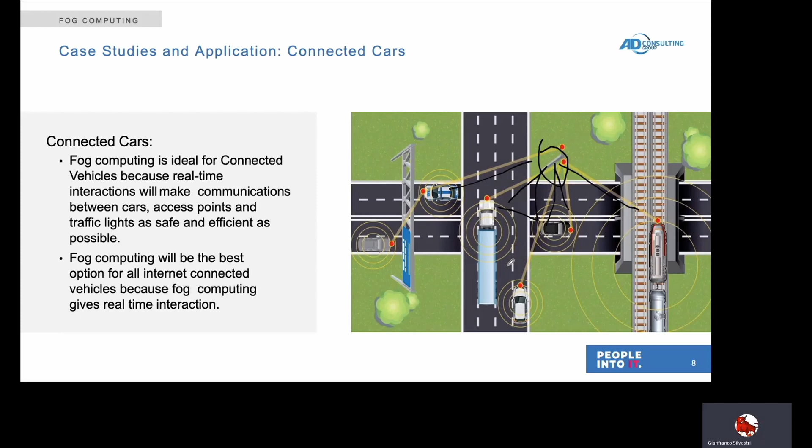And does it work? Yes, it works, and we did it here in Modena, in MASA, Modena Automotive Smart Area. What we did: we implemented real-time reduction of delay times from 3 to 5 seconds down to milliseconds, OBU onboard unit support with roadside calculation, and communication security from vehicle to fog and from fog to cloud. And by the way, already aggregated data means less cost for connectivity and cloud services.

The Internet of Things, IoT, aims to connect billions of smart objects to the Internet, which can bring a promising future to smart cities.

These objects are expected to generate large amounts of data and send it to the cloud for further processing, especially for knowledge discovery, in order that appropriate action can be taken. However, in reality, sensing all possible data items captured by a smart object and sending the complete captured data to the cloud is less useful. Further, such an approach leads to resource wastage, for example in network and storage. The fog computing paradigm has been proposed to counter this weakness by pushing processes of knowledge discovery using data analytics to the edges.

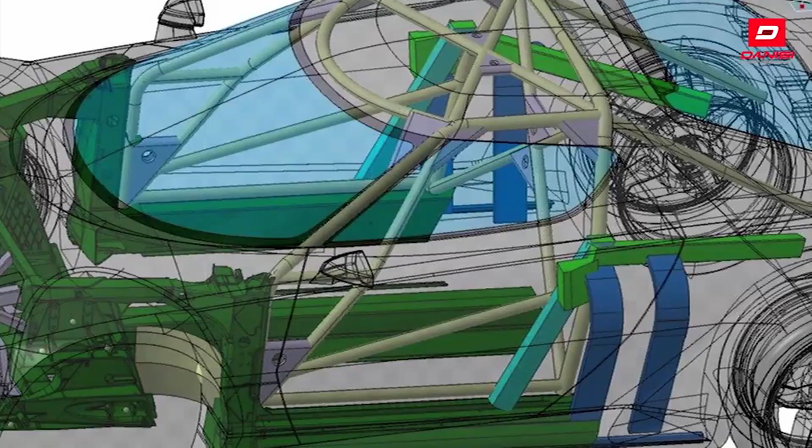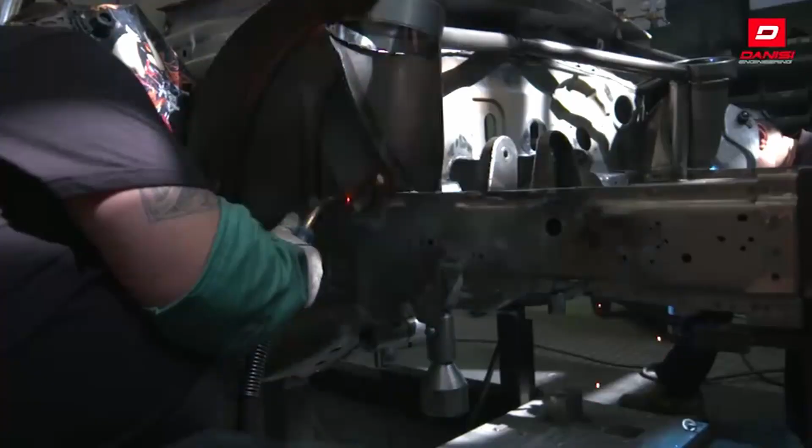Danisi Engineering is a company that was born 25 years ago with specific skills on vehicle dynamics and chassis engineering. Through these 25 years, we were adding a lot of other competencies, methodologies and tools. Nowadays we are a full service supplier giving support to OEMs and Tier 1 in developing new products and mainly new vehicles.

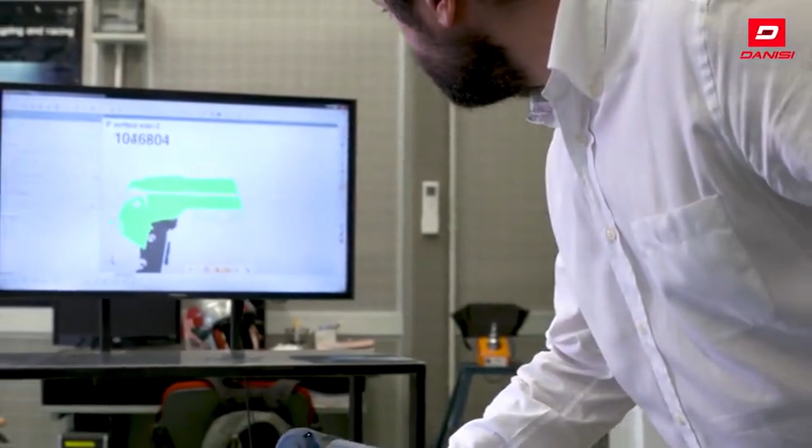We put a specific focus on integration, so we were developing a lot of innovative methodologies in order to better integrate the complex system that is a modern vehicle. Here in this facility we have some of the most advanced tools and we will go through these tools. We will present you our methodologies, and to do so I will leave you with Maurizio, that I will join very soon, and we start our tour.

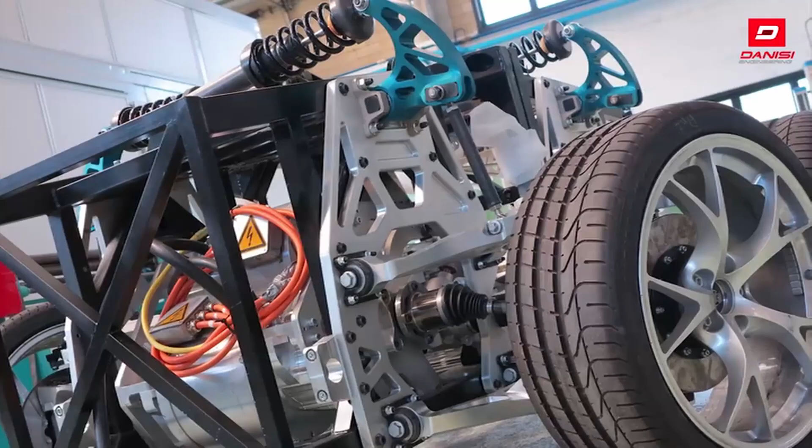Hi everybody and welcome in Danisi Engineering. In this period, the automotive sector is facing a sort of revolution if we consider the electrification path, the autonomous driving development, and new frontiers in connectivity. The big challenge is to introduce in the market as quick as possible new features and innovative technologies, but keeping in mind the business sustainability.

Before starting the production of a new product, OEMs and Tier 1 have to face a very long validation and testing process, using a lot of prototypes and pre-series cars, tested in very different conditions. Is there a place in which you can have thousands and thousands of prototypes and a plethora of open roads and testing tracks? This place is our Advanced Vehicle Dynamics Center, in which every day we can test different cars with different architectures. We can validate alternative technical solutions.

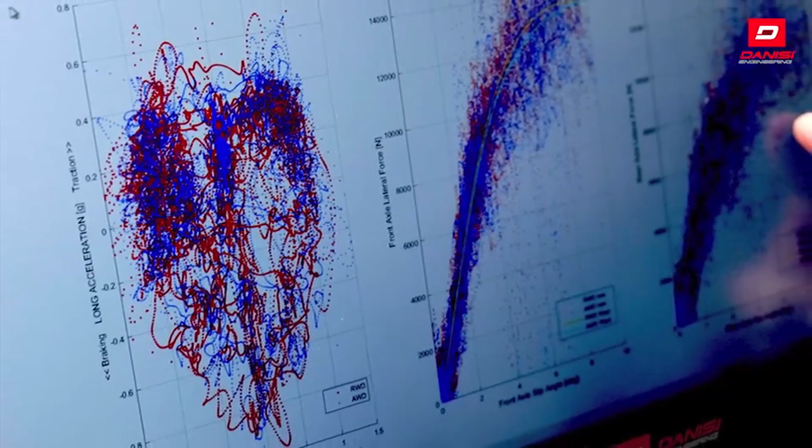We can judge the performance of different powertrain combinations. So this is our state-of-the-art methodology to support our customers in developing new products.

In the meantime, we have reached our static simulator area. Here we have one of our main tools in the development process, which is the static simulator. The main problem to shorten the development time is to start testing and to start the tuning of all the system as early as possible. And one big bottleneck is when the first prototype will be ready. So, with simulation techniques, simulation methodologies, we can start testing actually before the first prototype will be ready.

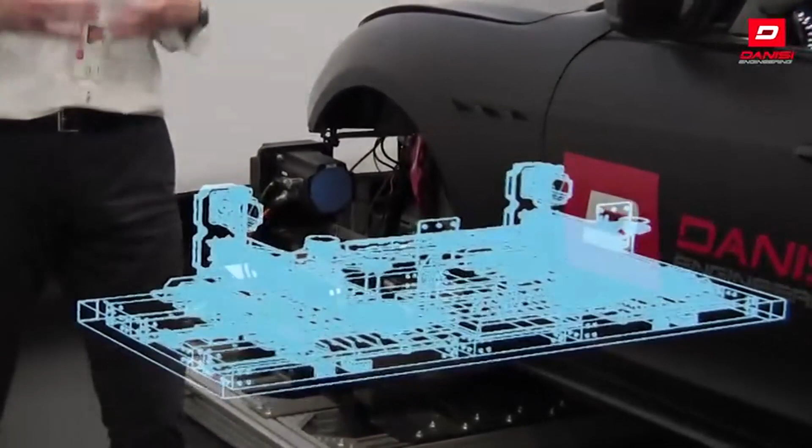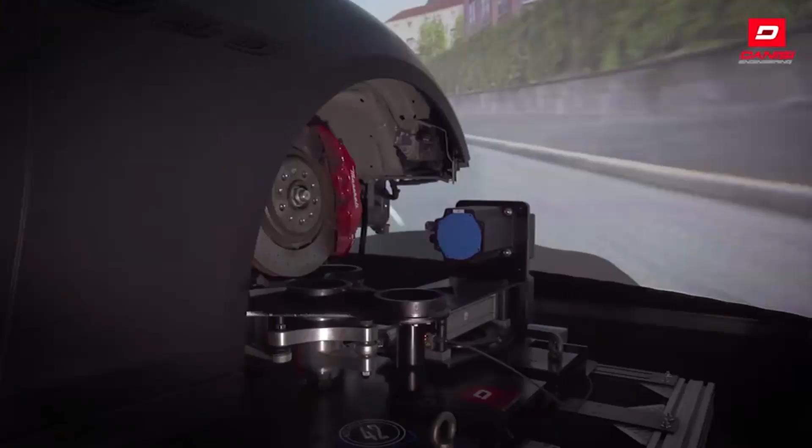Here in our static simulator we can put a car with all the original electric and electronic systems that will be under development, and we can even integrate some important physical systems. So at the end, we are able to make a kind of testing that is half virtual and half real. We can integrate parts like the steering rack, and here we have a specific bench for the steering rack, real components that get integrated into the virtual prototype. So actually it is a virtual prototype that is making real parts work. In this way, we can start the development process very much in advance.

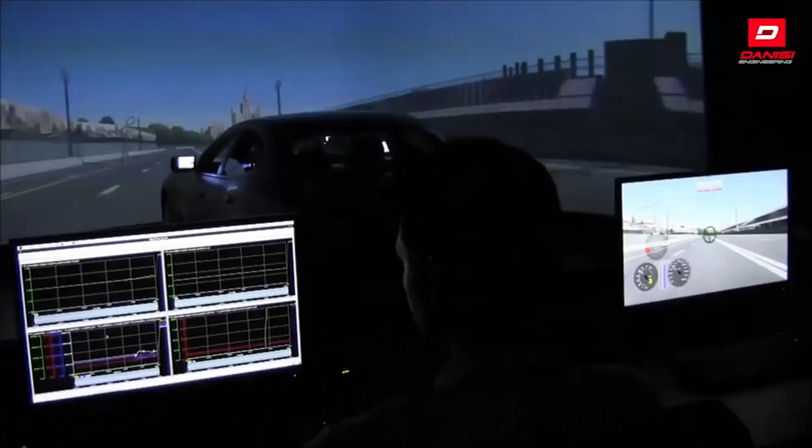There are a lot of strong points in this kind of approach. First one is timing - we can start earlier and be quicker. Second is the repeatability of the testing conditions, because in real testing, it can rain, it can be colder, it can be hotter. Here we can do the same test as many times as we like in fully controlled conditions. So it's a kind of laboratory conditions.

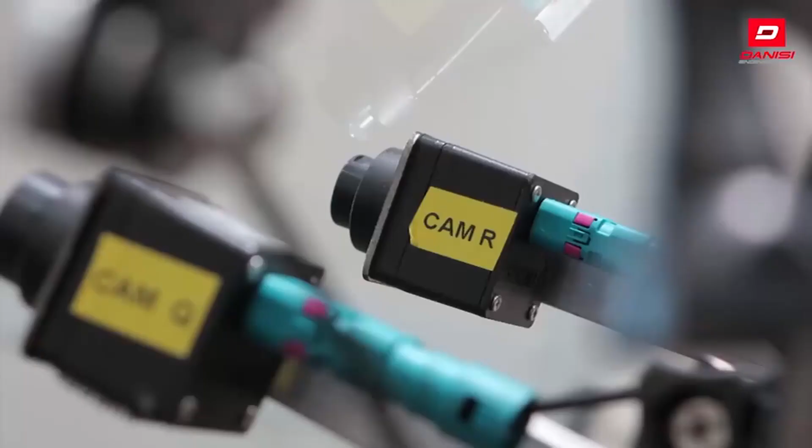Another very strong point is that we have full safety. We can even try and experiment something that is very dangerous, and if something goes wrong, everything is safe, under control. We are using this a lot to make the so-called fault injection testing, where we inject some bug in the software to check how the system will respond. To do this in the real world is quite dangerous - here we can do it in full safety.

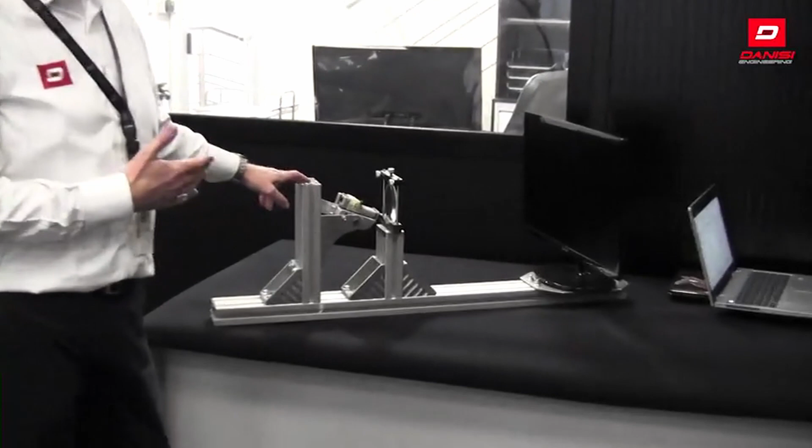Another thing I'd like to show you is this one - a small test rig that can put hardware in the loop, so on the virtual prototype, the real camera for the ADAS systems, for lane keeping, for automated driving. The camera is here and not on the car because on the screen of the simulator we have an image that is made to cheat the human eye. The camera is in front of a screen where there will be an image that is the same and synchronized with the simulator, which will cheat the camera.

But now we can go to see our dynamic simulator, which is even more spectacular than this one, where Maurizio is waiting for us. Let's go.

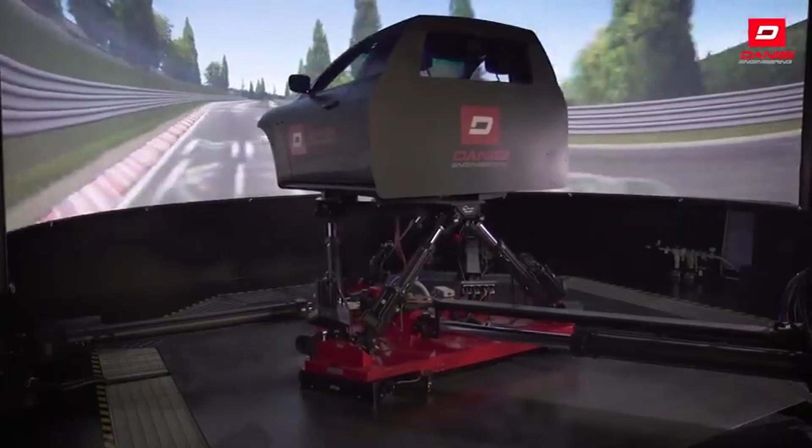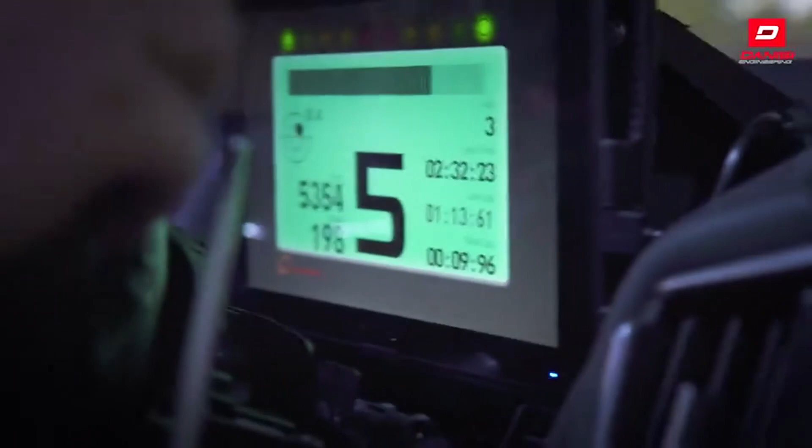This is the dynamic simulator, the most advanced tool we have here at Danisi Engineering. It is perfect for supporting each step of the technical development of a new product. With this tool you can feel acceleration and deceleration, perceive the grip on the road, and evaluate and judge the powertrain performance of the vehicle.

Oh, ciao Giacomo. So here we are, and I would like to, I'm interrupting Maurizio, not that polite, but I would like to...

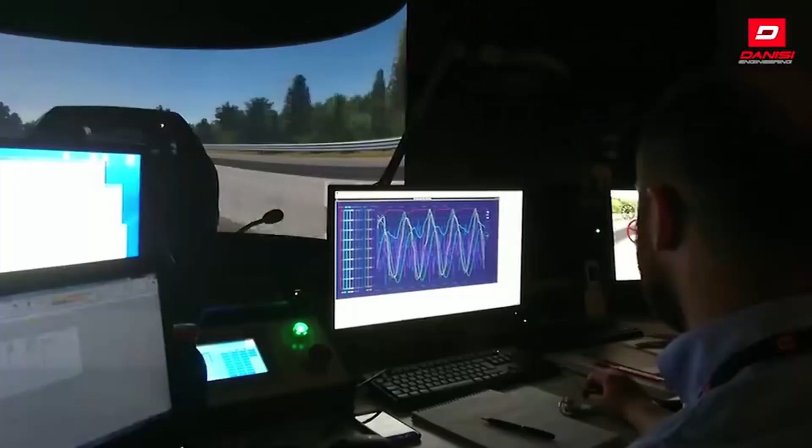I'd like to add a couple of points about simulators in general and dynamic simulators. We have our engineers in the control rooms who can change any parameter more or less in real time. This is very important because you can test two different setups or configurations in a few seconds, switching from one to the other. Whereas in the real world, if you don't have two prototypes and have to update the one you have, it can take several hours.

The other aspect that is very important is integration. We say that one of the main competencies at Danisi Engineering is integration. With the dynamic simulator, we can integrate the driver, the human, together with the vehicle. In modern vehicles, a lot is done by electronic controls, and these controls need to keep the driver into consideration. The driver is acting on the car, acting as a sensor, feeling what is happening, and also acting as an actuator. So one ring of the control chain is the driver.

This tool allows us to study the control with the full chain, with the real driver inside. So this is a way to integrate reality, the driver, a real human, into a virtual methodology, to go deeper into these kinds of aspects and methodologies.

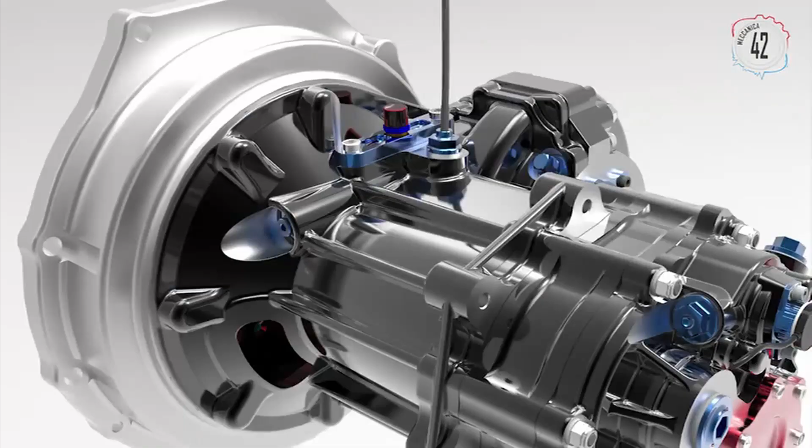Hello Giacomo, thank you for your kind introduction and welcome to Meccanica 42. This company was born in 2015 as a spin-off of the University of Florence, in close partnership with Danisi Engineering. We mainly focus on development of mechatronic solutions for the automotive industry, and we validate advanced vehicle functions both on the road and in a driving simulation environment.

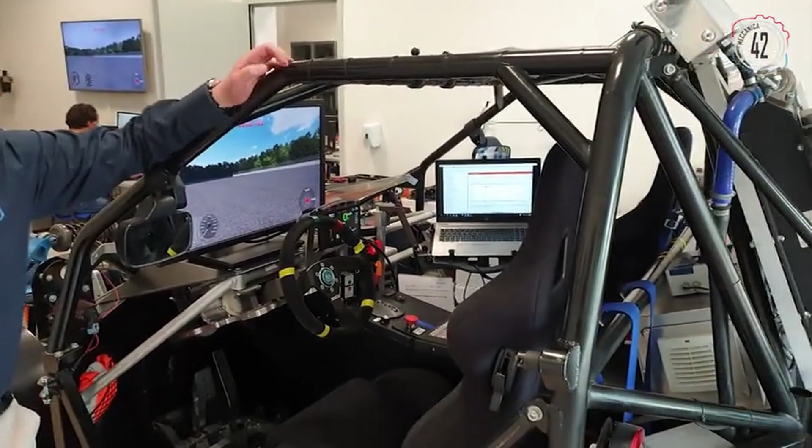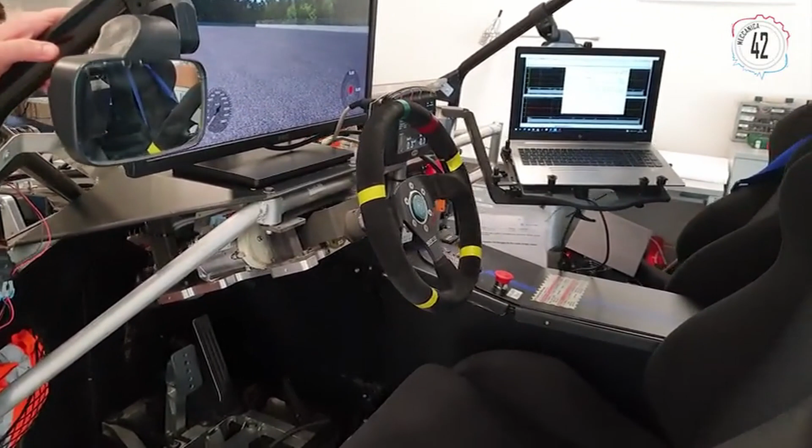This vehicle is a good example of what we do here. It is a fully by-wire vehicle coming from one of our customers. It is a steer-by-wire vehicle, so the steering wheel is not connected with mechanical joints to the front steering wheels. We are also integrating a brake-by-wire system in which each wheel is actuated by a single actuator, to have good braking performance.

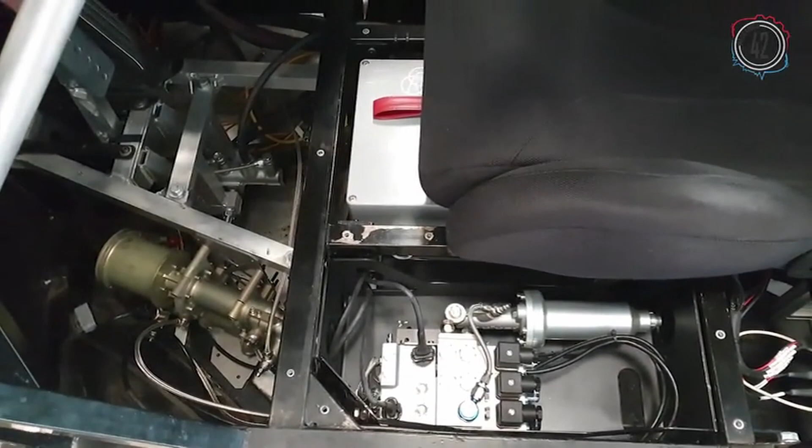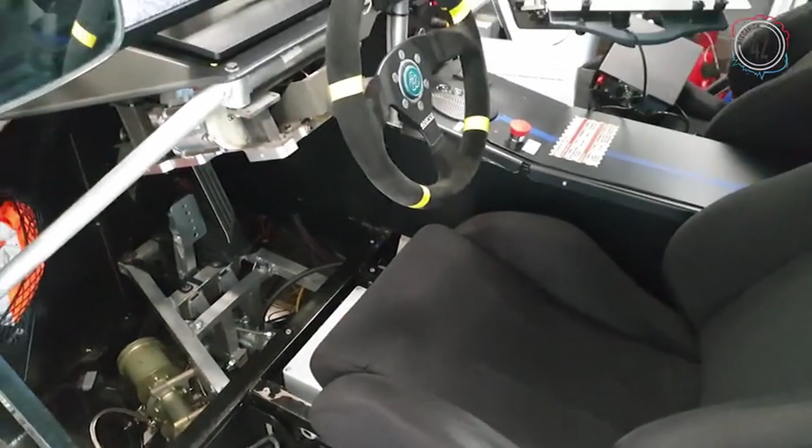To guarantee a good level of safety, we also installed a fallback unit, so in case of emergency, the fully passive braking system is recovered. We also have a feedback unit to provide correct feeling on the pedal. Since this vehicle is completely drive-by-wire, we can integrate it into a driving simulation environment, where a driver can test all the vehicle's functionalities and see, for example, if it remains controllable if one of the actuators goes into a fault condition. Now I can drop into the car and take a short run into the VDA.

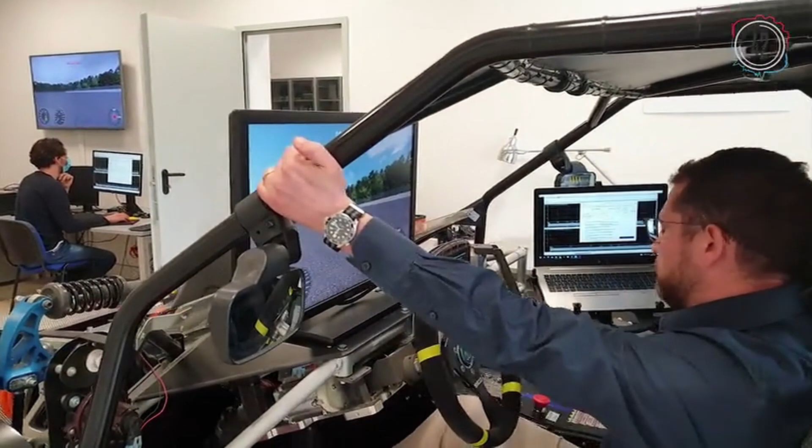I'm starting the simulation. Just a quick run, going to 60 kph. Now starting steering, recovering the trajectory, and going straight and braking. That's it. Thank you for your time, and the connection goes to Modena. Goodbye, thank you.

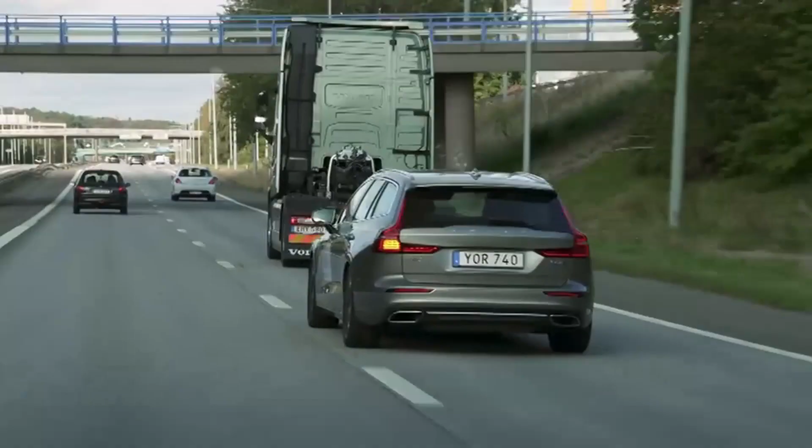The third showcase is from a test track where a partly autonomous driving car was connected to Carmenta Traffic Watch, mixing real objects with simulated ones, showing how the car control system gets both decision support on how to adapt speed in the vicinity of an emergency vehicle, and also receives warnings about vulnerable road users and roadworks.

The following short film showcases how Carmenta Control Tower supports automated vehicles with situational awareness and how a control tower setup for a fleet of automated transport vehicles could be arranged. Tests and demonstrations are performed on public roads and on test tracks.

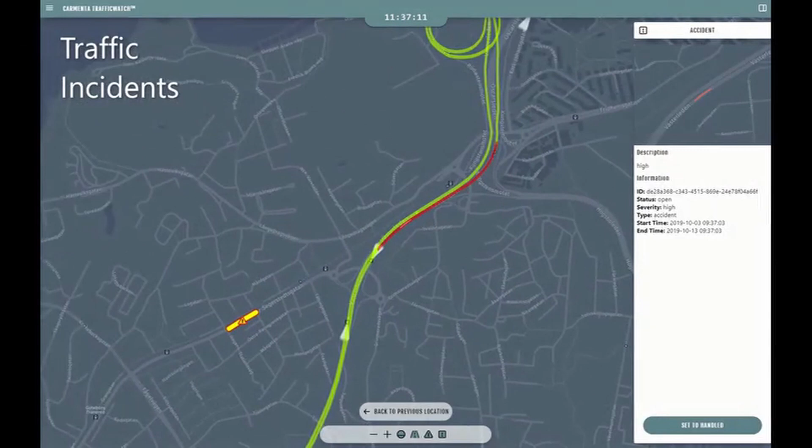Traffic incidents reported from traffic authorities are followed closely in Carmenta Traffic Watch, and a rule engine is used to decide proper actions, such as automatically sending advice to an OEM to disable autonomous driving on the affected road segment, or even issuing a safe stop.

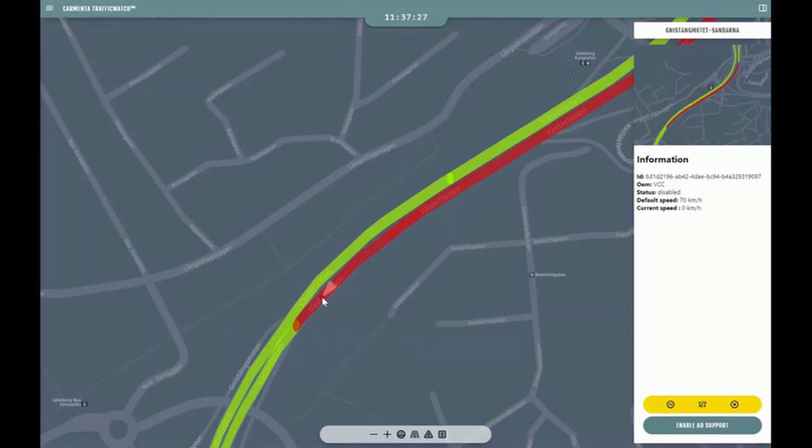An incident on the road, such as a traffic accident, can allow a manual operator to decide how and when to issue advice to the OEM when any of their vehicles approaches the accident.

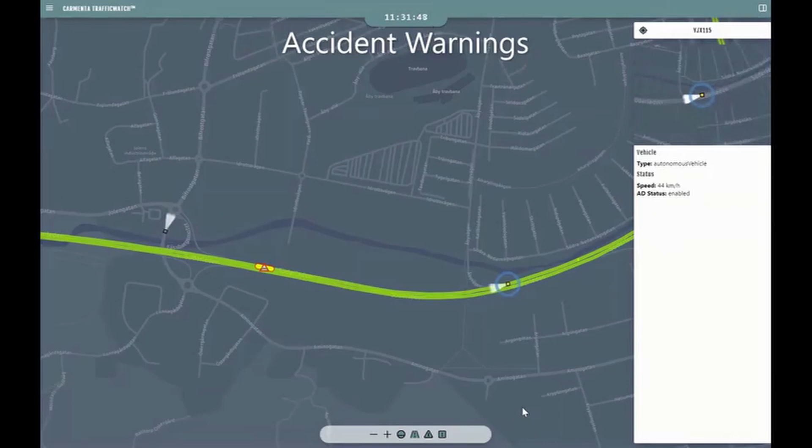Carmenta have worked together with the Italian company and MASA partner Sprinx Technologies to connect their Sprinx traffic system with our Carmenta Traffic Watch platform. This adds a very intelligent traffic monitoring system to Carmenta Traffic Watch that automatically detects and reports activities in the traffic environment. One example is pedestrian detection that could be used to warn if a person is walking into a dangerous area. This creates an incident in the Sprinx system that may trigger an action in Carmenta Traffic Watch. The integration also allows control over the Sprinx system and traffic cameras from Carmenta Traffic Watch. Live video feed can be activated by the traffic operator for a better understanding of the traffic situation.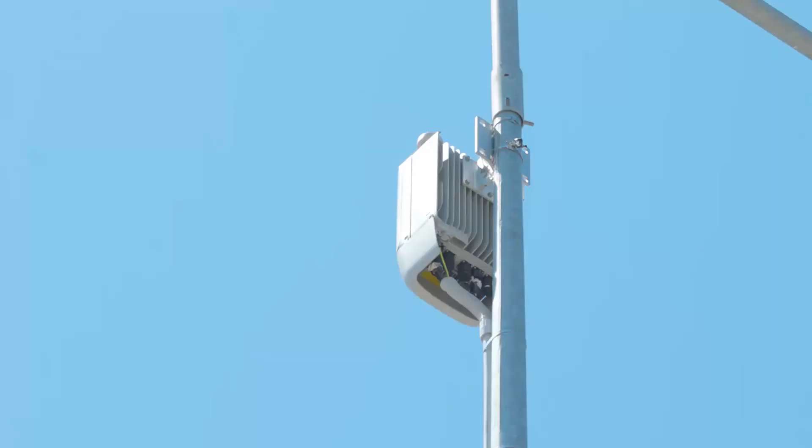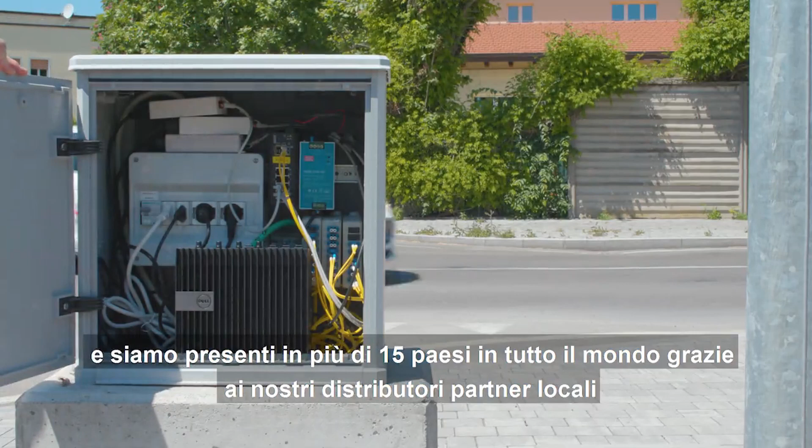Sprinx has an international reputation on the market. In fact, we have already provided more than 80,000 video channels in 10 years of our life, and we are present in more than 15 countries all around the world thanks to our local distribution partners.

Thanks to our internal R&D department with high profile figures in the field of computer vision and artificial intelligence, we are able to provide something really innovative on the market in terms of mobility analysis.

We are very proud to be part of the MASA project because we think that when we speak about smart mobility, we don't speak about a specific technology, but we speak about the combination of the best of breed of technologies. In fact, it's the enrichment of the data coming from different technologies and sensors that can make mobility real smart.

We are very happy because in this case we have provided our software platform called Traffix.ai, based on deep learning technology, that connected to standard CCTV cameras is able to give information about the mobility, immediate information about anomalous situations like wrong-way drivers, unsafe lane change, stopped vehicle, or pedestrian in the carriageway.

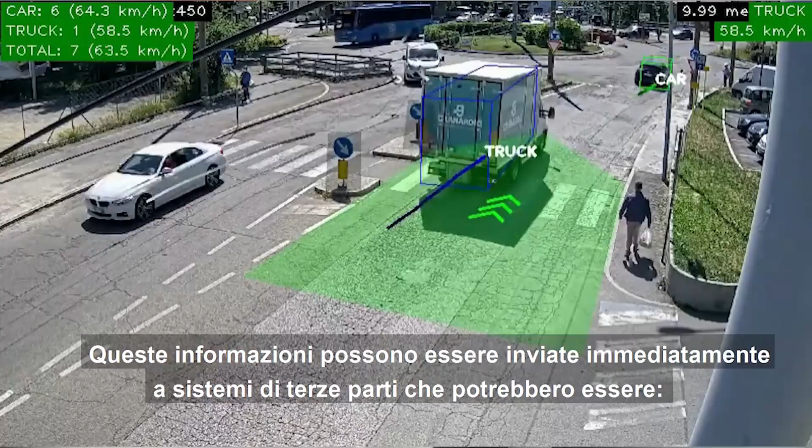And this information can be sent immediately to third-party systems, that could be the software in the control room, whether that's the operators, but also to the drivers, thanks to software installed directly in the vehicles. So the drivers can be alerted immediately and we can reduce the risk of accident.

But our technology is able not just to give immediate information about dangerous situations, but we can also collect useful information about traffic mobility. For example, we can classify the vehicles, count the vehicles, and give information about the average speed of the vehicles. This information is very important also for the traffic planners because in this way we can understand if too many trucks are passing in the city center, for example, or too close to the schools, and we can define new rules and new plans inside the city.

Also, the average speed is useful information in order to understand if it is important to introduce maybe traffic lights or roundabouts. We can give also information about the direction of the vehicles at intersections and roundabouts.

Last but not least, we have a new function that is able to give information about the violation of social distancing. As we know, all of us are looking forward to coming back to normality, or at least to a new normality. But to do that, everybody has to respect the rules. As we know, not everybody is able to do that. When we are outside, we forget this, and we must find out something that can help us reduce the spreading of COVID-19 and avoid going back to lockdown.

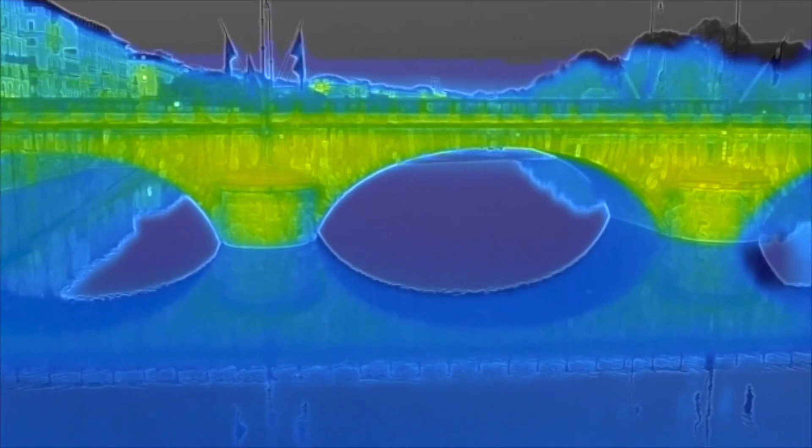Here we show you the images taken while flying over Valentino Park, maybe one of the most beautiful in Turin, located around the river Po banks. A total of 1.7 million square meters of park area have been monitored.

Artificial intelligence. We use artificial intelligence to analyze the video streams coming from the drones and detect people, vehicles, and any other object when requested. The detections are corrected in perspective, and the position on the ground is calculated.

Since the drones use 4K cameras, we can detect people even from a distance and from high altitude. This is particularly important in COVID phase 2, since people are allowed to go to the city park for outdoor activities, but recommended social distancing should be maintained at all times.

Those artificial intelligence algorithms calculate the interpersonal distance between people in real time and raise warnings in case the safety measures are violated. The dashboard.

All the data are available in real time and can be stored in a database to help in making decisions at commission level.

But since the data are available in real time, it can be used to trigger an immediate police response, like in this case, where 2 cyclists were caught in a city park during the lockdown.

3D mapping. Furthermore, the collected data can be used for alternative purposes, however, of great importance for the municipality. For example, drone video streams can be used to create high-definition 3D maps of the area overflown, like in this case.

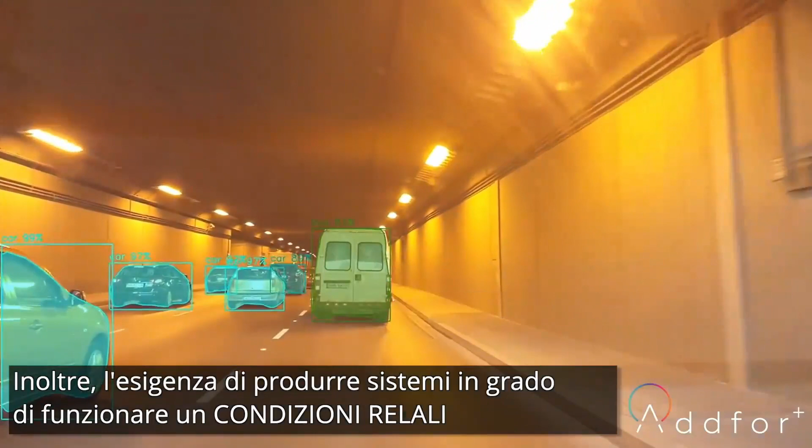Moreover, the requirement of obtaining a neural network able to recognize entities in real conditions, such as different weather and lighting conditions, or varying environments with different characteristics, makes the heterogeneity and variability of the training set mandatory. This means that to obtain a suitable dataset, we have to collect many images with a large number of characteristics, weather conditions, lighting conditions, and so on. Capturing enough images in the real world and then labeling them is an extremely expensive and time-consuming process.

Synthetic data can be an alternative solution to replace or integrate real data, and can reduce the problems of cost and waste of time. Obviously, other problems arise, and the most relevant concerns the problem of domain transfer. This means that synthetic images do not look exactly like real images, even if the larger part of the literature reports that synthetic images should be as photorealistic as possible.

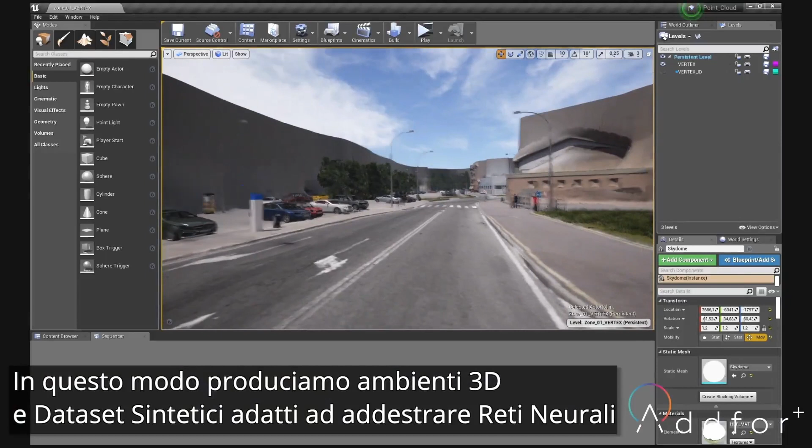In this sense, laser scan can be employed to acquire portions of the real world, producing 3D environments that have a high level of realism. These environments can be used to generate synthetic datasets suitable to train neural networks.

We used a laser scan platform to acquire some areas of the city of Modena. The platform is equipped with several laser scanners and a set of 6 cameras. The point cloud was used to model the meshes of the objects in the synthetic scenario and all the geometries in the environment. The images have been used to generate the textures and then the materials of the 3D objects.

This technique ensures a high level of photorealism, and the 3D environment can be used to exploit all the advantages of working with a synthetic navigable space. It is possible to automatically obtain the ground truth of the rendered frames by replacing the realistic material with monochromatic materials, and it is also possible to change weather and light conditions, or to add specific elements to better characterize the situation, such as representing critical situations like a pedestrian or a generic obstacle in the car trajectory. Moreover, it is also possible to add a number of virtual cameras and change many times the point of view.

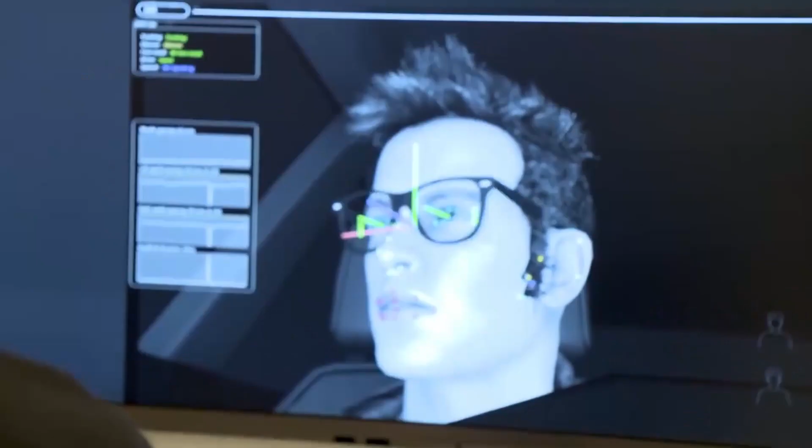We use infrared cameras, and we detect the features of the face, the salient features, like eyes, eye corners, nostrils, mouth, and so on. We build a three-dimensional model of the face using AI that we can track over time. That can be used to see if a driver in the car is drowsy, inattentive, or showing some other dangerous behavior. We can warn the driver before they actually fall asleep, because of course anyone can see if an eyelid is closed or not — that's usually way too late. You should really give feedback to the driver before that happens.

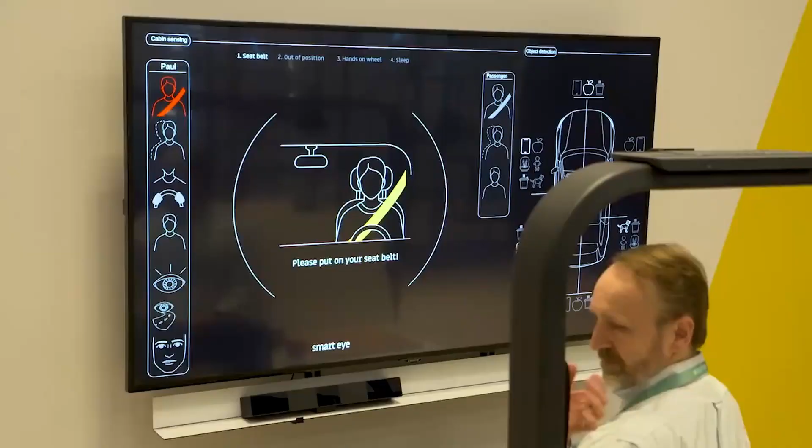A lot of the algorithms we are using are based on deep learning, so it's completely AI based, but we've also been doing this for a long time, so we also have a set of algorithms which works really well, just computer vision based traditional algorithms. So one of our strong points is that we can use the best from both worlds. The computer vision algorithms can be very resource light, and the deep learning algorithms can be very robust. So we can use both types of algorithms to get a good, really robust system. That's needed — if this is going to work in the car, it needs to be super robust.

This gives car makers the possibility, even with a level 2 system which is just partly autonomous, to allow the driver to not keep their hands on the wheel as long as they're really focused on the road. The trend we see right now is that the rollout of autonomous technology takes longer than people thought 2 or 3 years ago. We see that for sure there will be level 5 cars eventually — complete robotaxis that just circulate, which you book with an app, they pick you up, and you go anywhere. But this isn't going to happen tomorrow or in 5 years. You will have a few level 5 cars on the roads in 5 years' time, but I think the major rollout is after that. In the meantime, we see a strong trend where level 2, 3, and 4 cars are going to get better and better, and they're also going to be supported by driver monitoring systems.

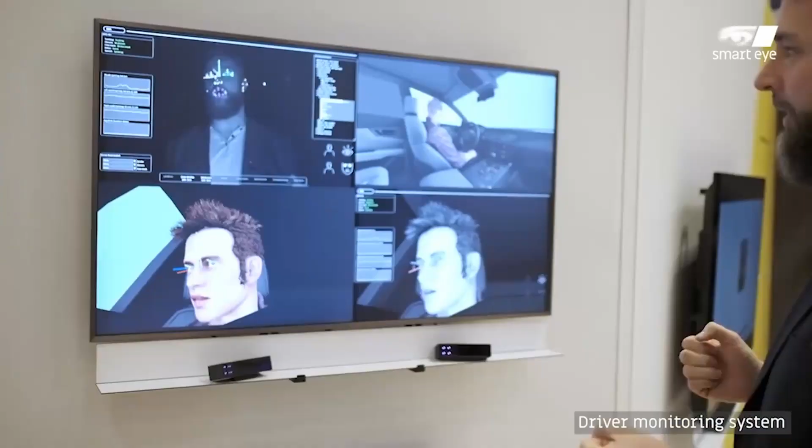As you can see with the overlay graphics on the screen, it's accurately tracking me regardless of how I move and what I do in the car. On top of all these signals, we are building state-of-the-art drowsiness detection and driver inattention detection algorithms that can be used to improve the safety of both manual and autonomous driving cars.

What we're also showing, in addition to our driver monitoring functionality, is our future functionality in the interior sensing space. Over here I'm going to show you how we can combine interior sensing with driver monitoring.

In the top right corner of the screen you see a driver monitoring view, with super high accuracy on my head position and gaze direction. In the top left part of the screen, the system has identified me as Peter, which is my name, so the system can do facial recognition to see who is driving the car. In the main part of the screen, we're showing body position, how you're sitting in the car, and what you're doing with your limbs.

We're also tracking objects like cups and food, and also, of course, the main thing in the automotive space, whether or not you are on your phone when you're driving.

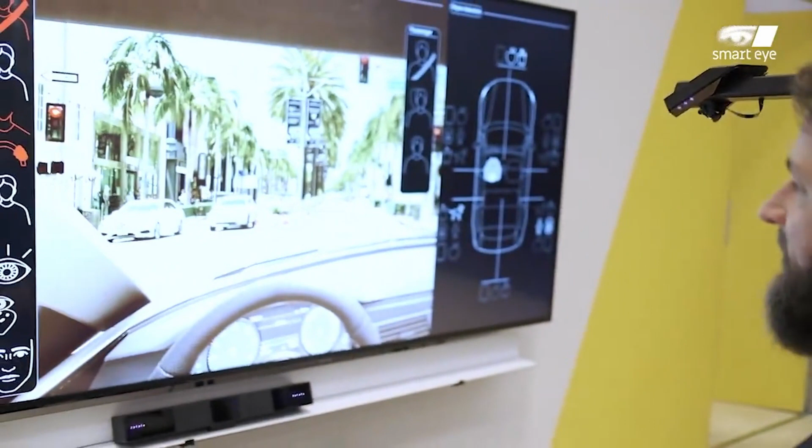Now I'm going to go through some of the advantages you get when you combine driver monitoring with interior sensing. Here in our driving simulator, I'm going to show you the different signals that we can get from the different cameras in the car.

From the interior sensing system, we can see in the top left part of the screen that I don't have my seatbelt on. If I take my seatbelt and put it across my chest, it detects that I have a seatbelt, and I get that in the buckle. Now I'm safely strapped into the car.

It can also detect whether or not I'm sitting in a good position. If I lean out of position, you can see that the car can tell I'm not sitting in a good way, and that it might not want to fire the airbag because I'm too close to the steering wheel.

You can also see that when I hold my hands out and touch the steering wheel, it detects that I'm holding the steering wheel, and when I take my hands away, it can tell that as well. Also, if I bring an object up to my mouth, like I'm eating, or a cup, like I'm drinking, the system can accurately tell whether I'm doing things that could be considered dangerous in a driving scenario.

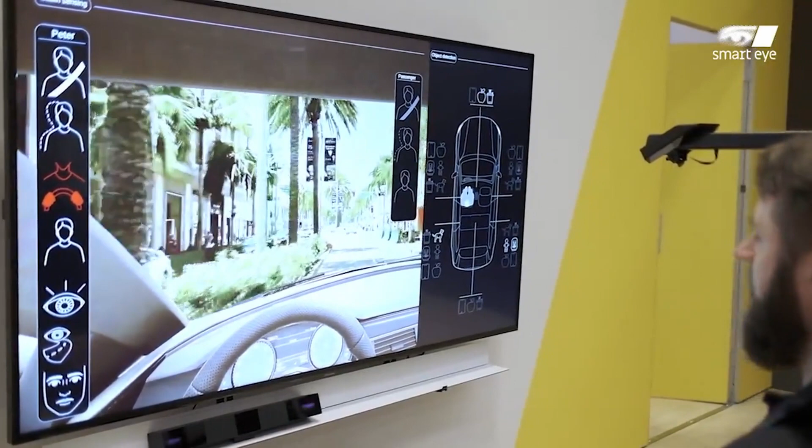We also do object detection in the rear seat of this car. As you can see, we have a dog and a child in the child seat. If we remove the dog from the rear seat, the system can detect that the dog is no longer in the car.

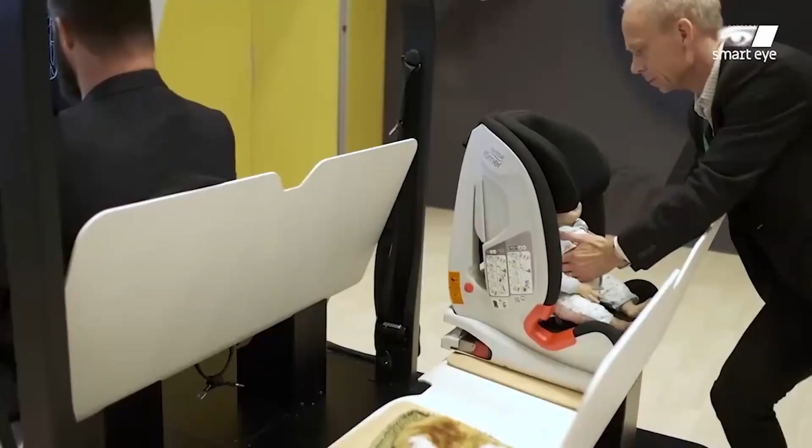And if we put the dog back, it appears again. If we remove the child from the child seat, the system will detect there's no longer a child there, but the child seat is still being detected. Then we put the child back, and the car now knows that we have both a dog and a child in the rear seat.

So now as I get out of the car, I unbuckle my seatbelt and step out, the car will realize that the driver has left, and then it will indicate to the driver, perhaps by sending a text message or an audible alert, that there's a child and a dog that's been left in the car.

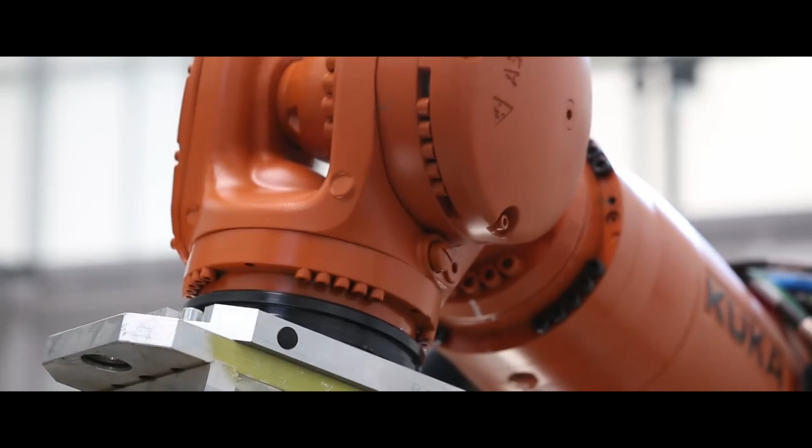This demo for the Motor Valley Fest will present the Formula Student Driverless team. With this project, the students are creating the cars of tomorrow.

These cars will really be computers on wheels, with more and more intelligence on board, and they will also be connected cars with the cities, surrounding environment and city via 4G, 5G and several communication protocols. Developing such systems requires skills in mechanics, informatics, telecommunication, electronics, mathematics and several sciences.

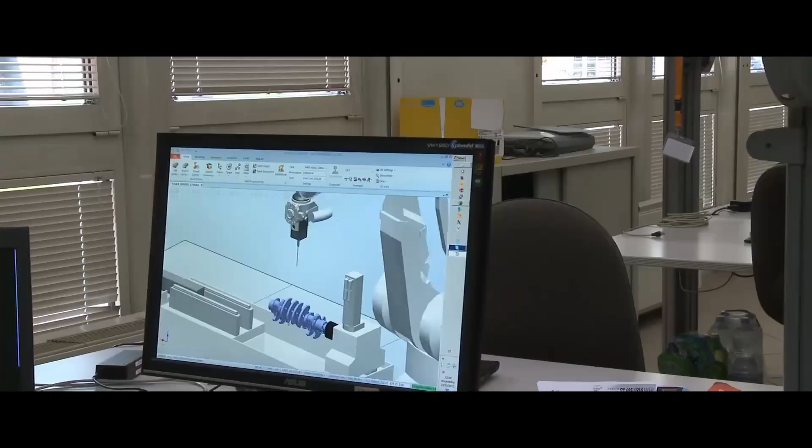We believe this really makes the difference for students' education, because they are forced to speak the language of other sciences than the ones they studied. Mathematicians have to speak with the mechanical engineers, which in turn have to speak with informatics, and they have to speak with the telecommunication and electronics engineers.

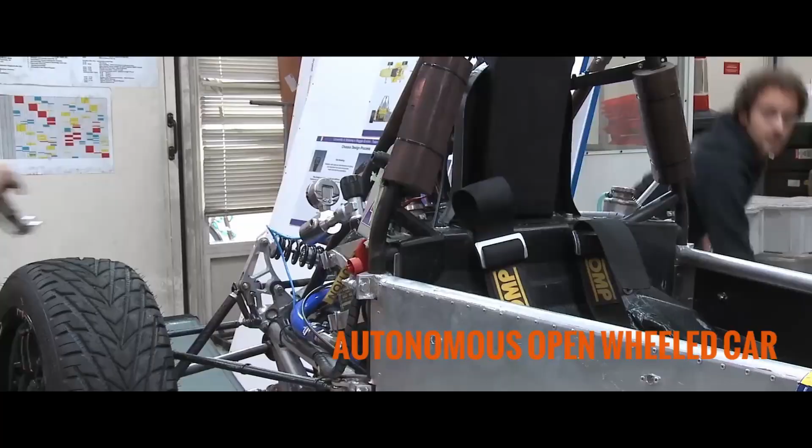The Formula Student project consists of the design, construction and setup of an open-wheel car to compete in a series of events organized by the major international engineering association. Each team is composed only of university students, who work independently in a coordinated manner in order to create a competitive car.

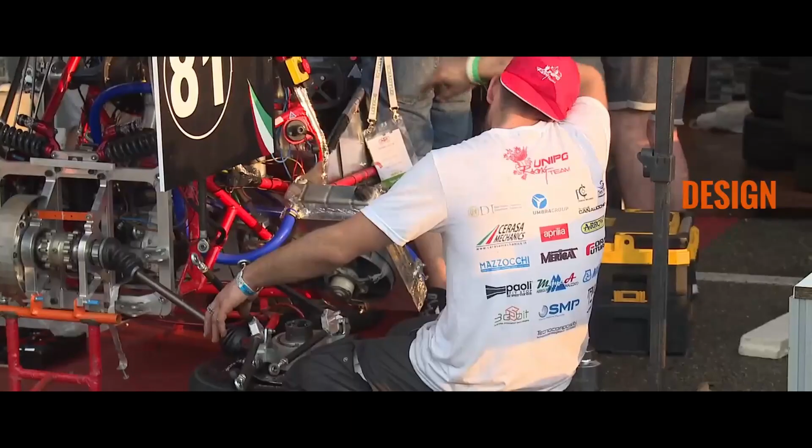In Formula Student Driverless, students must build a car that can be either driven by a pilot or move completely autonomously, thanks to LiDAR, camera, onboard intelligence, car control and actuation system.

In addition to the car, each team must present a business plan and documents that justify all the design choices and characterize it as a real company.

Our team is composed of 4 divisions: mechanics, IT, electronics and business. The added value of the activity is that each division is closely connected to the other. This allows you not to focus your knowledge on a sectoral context, but to acquire experience and skills transversely.

The main actuators in a self-driving car are brakes and steering, and because we chose the extra challenge of working with the combustion engine, we had to develop an autonomous clutch system.

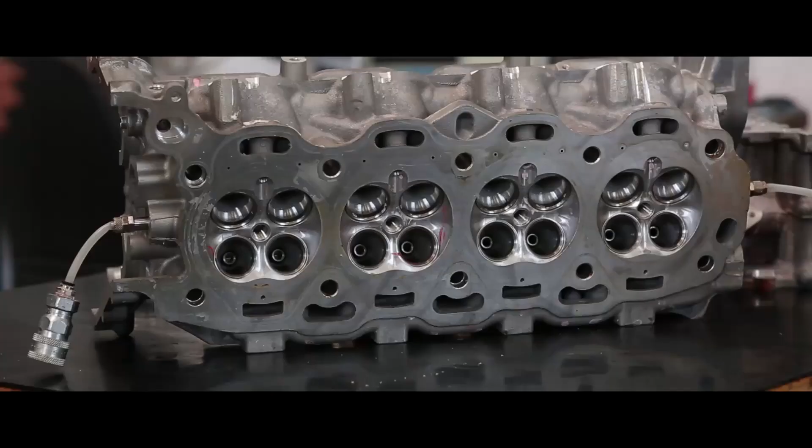During the development of each actuation, we encountered many problems and adversity due to the fact that the technology often used in these fields is new and in development. An example of this struggle was the braking system.

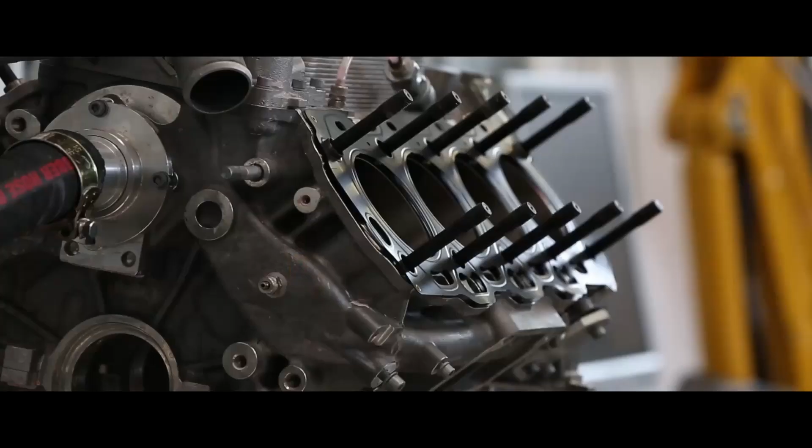Because of the size and weight of the vehicle, most common solutions available aren't suitable for us. So we had to take a different approach and come up with a new system ourselves to deliver the performance needed. With the development of a driverless car, the vehicle's electronics got a totally new role compared to what used to be in the past.

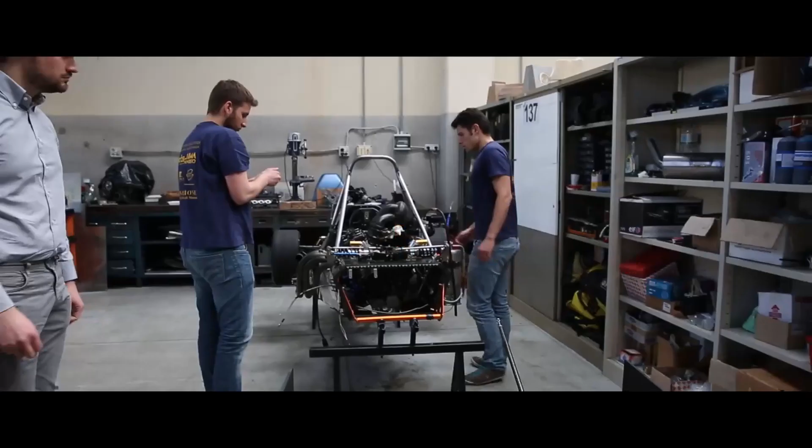Inside the vehicle we added 2 microcontrollers programmed by our team, an ECU and some devices which help us in the development and management of some actuators.

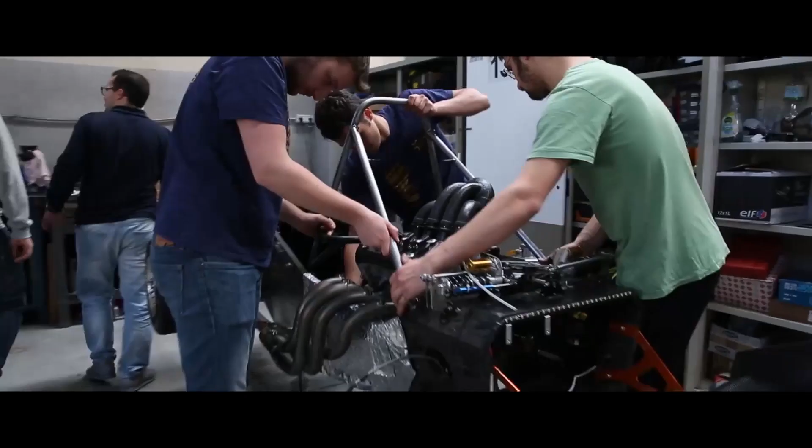One of our tasks is to fulfill all the requests that we receive from the autonomous driving software. In order to achieve that, we are currently working on some models such as an adaptive cruise control, braking system, engine response time, launch control and a robotized gearbox.

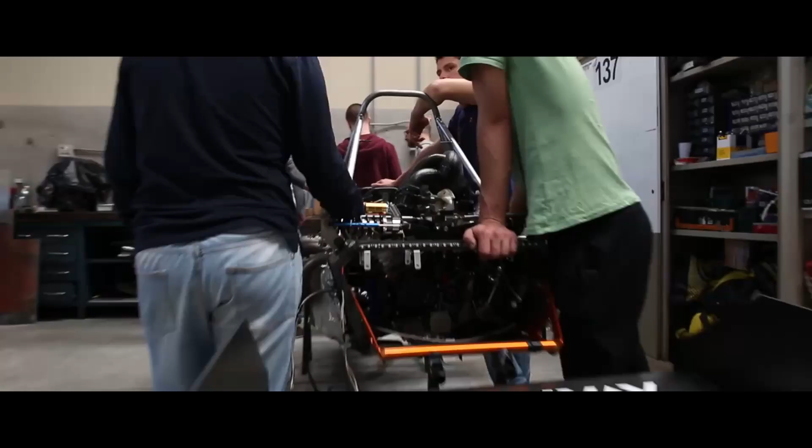As information technology students, we are developing the entire driverless software system, which will be our car's brain. Through the camera and the LiDAR, the car is able to scan the circuit, detect the cones and navigate between them.

All the data coming from these sensors are processed by special NVIDIA-powered computers. Neural networks and real-time algorithms do the entire job. To speed up software developing and testing, a custom simulator is being created by us.

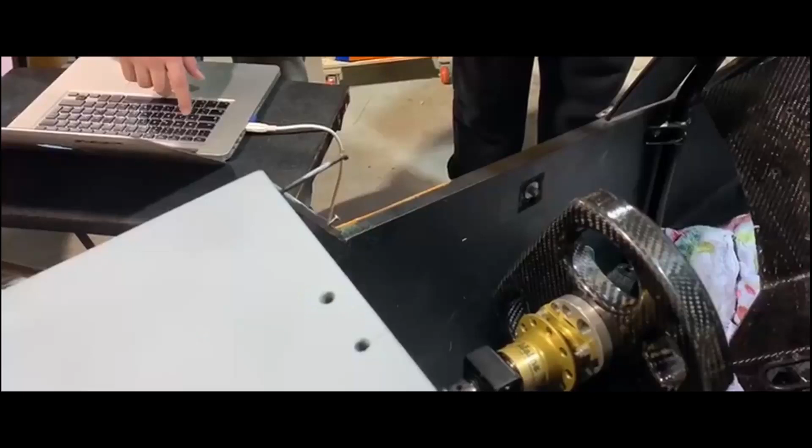It is strictly interconnected with our self-driving software, giving us the possibility to try different solutions and tune parameters with precision without having the necessity to operate on the real car.